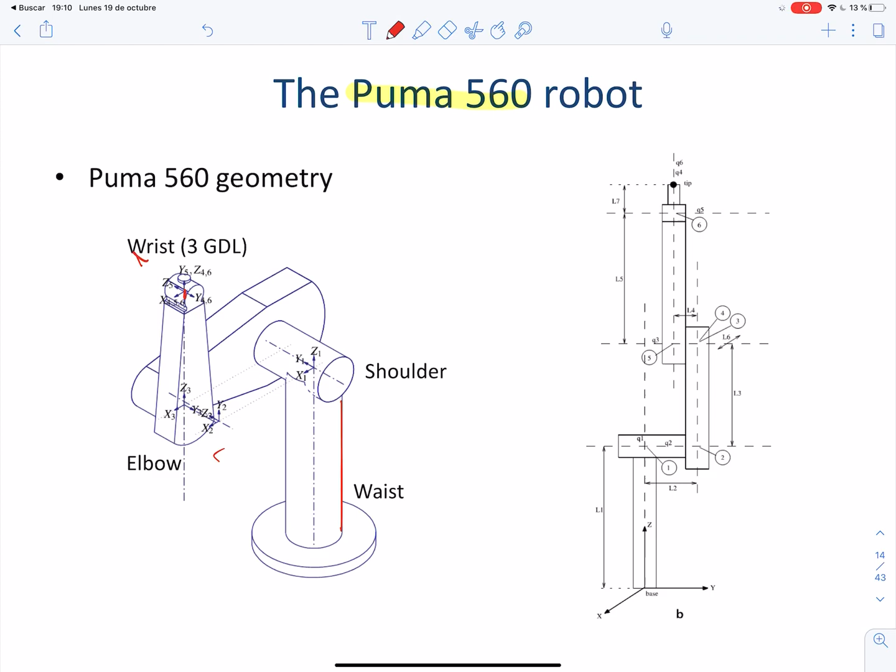For some reasons, one of them is practical, but other reasons are purely mathematical, as we will see in this chapter. So it's not hard to see that there are 6 coordinate frames, and these are presented here. There are 6 joints. This is the frontal view of the robot on the right.

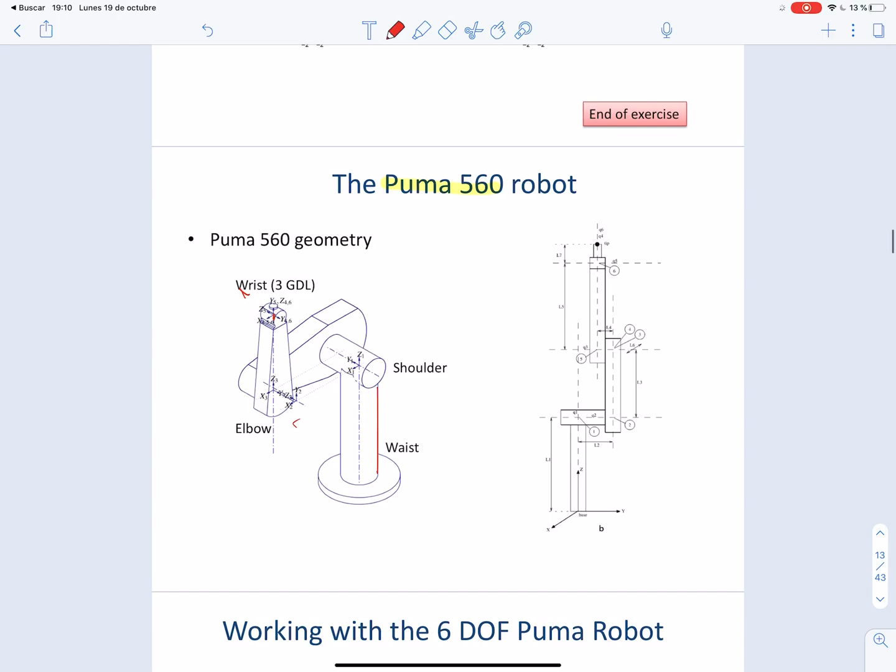And the nice thing is that we are going to work with a model of the Puma 560 robot in MATLAB. The model is included in the robotics toolbox that we have been using already. But after the regular loading of the robotics toolbox, which often comes with calling startup RVC, we then have to load the specific robot model by writing MDL_Puma560.

And from that moment there's a new object or variable that appears in the MATLAB workspace called P560. So this is a new variable. But more than a variable, it's an object, and an object is like something more powerful than a variable, because it can have values, like for example...

P560.links. It has some values which are the links that form the serial link object that is inside it. But it also has methods, like the forward kinematics method that we have introduced before.

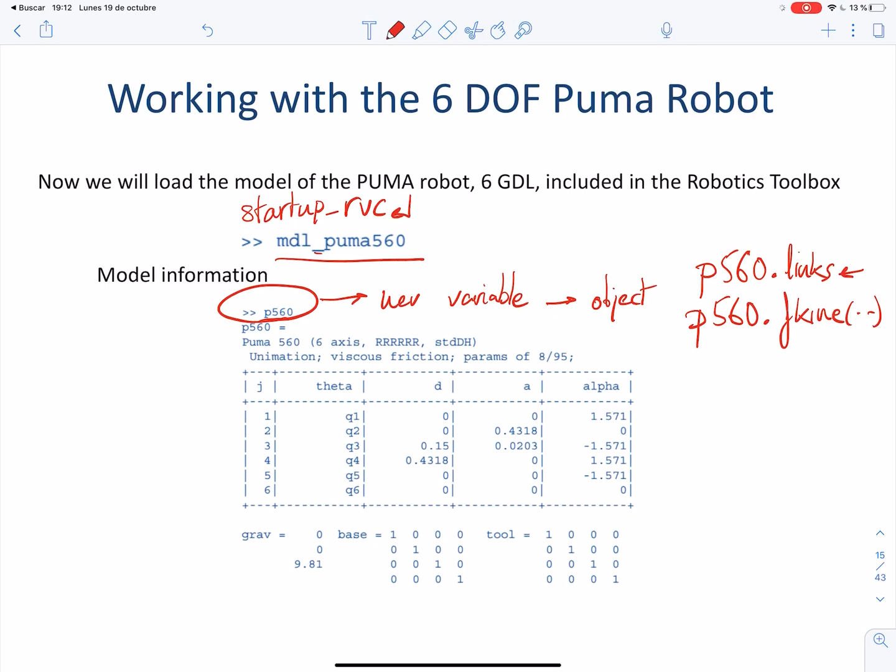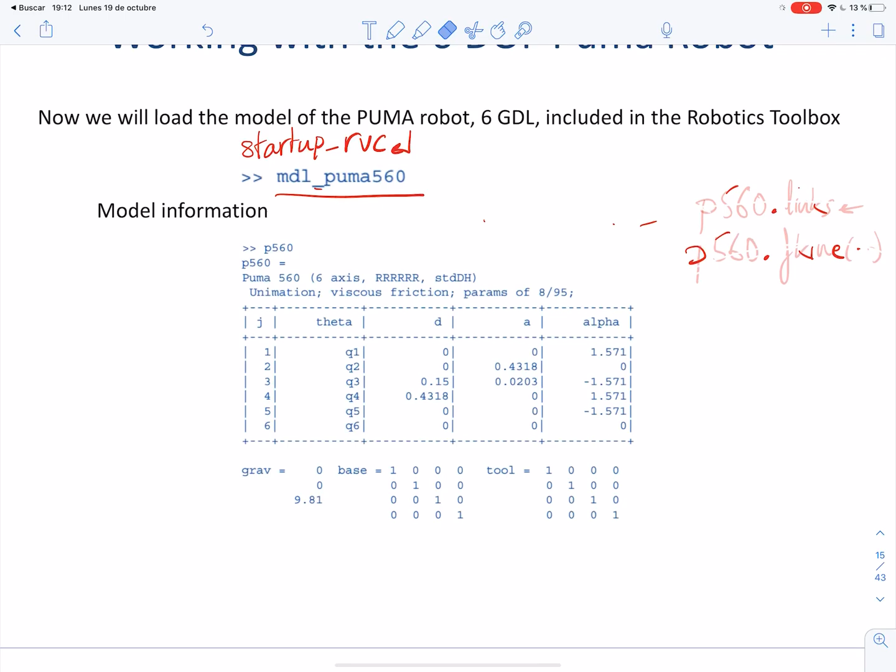And the point is that in order to take a quick peek at the contents of this object, we can just write in MATLAB: P560, and enter. MATLAB will give us this information in return. First of all, this table appears with what is easy to identify as a set of Denavit-Hartenberg parameters.

So there are of course 6 joints, so there are 6 sets of parameters here. And what is more remarkable or interesting is that the theta variable in each of the joints is actually the time varying variable, the non-constant variable. This is equivalent to saying that all the joints are revolute, are rotational.

There are no prismatic joints. But if we remember from the first discussion, not having any prismatic joint does not imply that dj must be 0 for all joints. So there are specific values that we associate to the displacement of the coordinate frame along the axis of rotation of the joint. These are non-zero values necessary to perfectly describe the geometry of this robot.

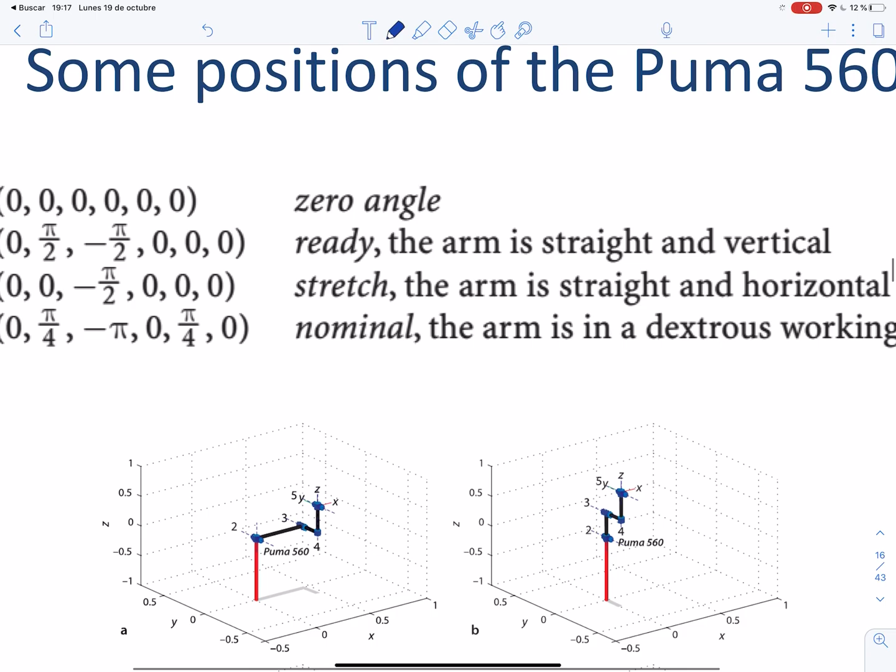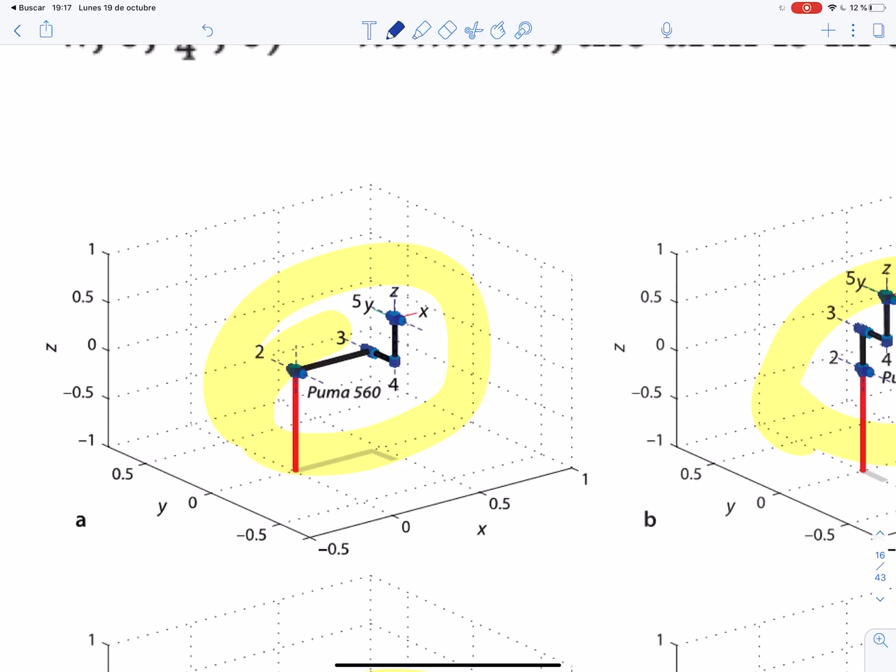And now some more about the new robot called Puma 560. In this slide we observe a set of 3D plots of something that, if I didn't tell you, you would have never thought is a robot, but it is. This is a representation of the robot with all its joints.

The first joint is around the vertical axis, so it's not depicted here, but the second joint is this one, easy to see as a shoulder. The third joint is easy also to see as an elbow. And then finally the three remaining joints represent the end effector of the robot.

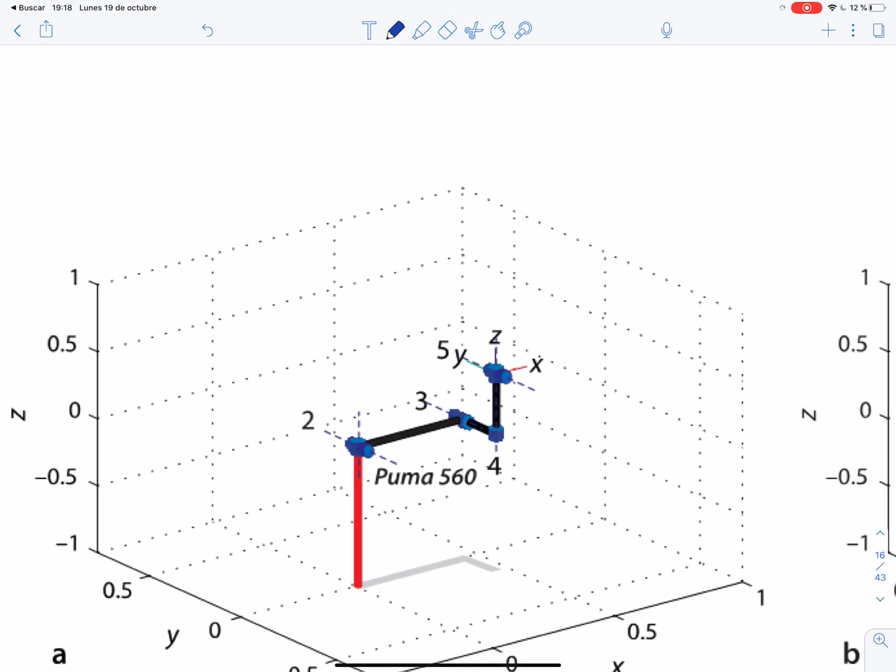This depiction of the robot might seem not intuitive, but it is a nice way to represent a robot, because you are visualizing just the things that are important for the kinematics, which are the axes of rotation. This is an axis of rotation, this is another one, vertical, and this is another axis. So it's interesting to have a simplified representation where only the axes of rotation appear.

And the axes of rotation are not coincident, so there are distances among them, and these distances are due to the fact that the Denavit-Hartenberg parameters are not zero, so we must make displacements to go from one axis to the next. Once we have an idea of what this plot means in 3D, not forgetting these three axes are X, Y, and Z.

Once we know that, we can represent the robot at different configurations. These configurations, which are just like poses or positions of the robot, are identified by the value of the angles of each joint of the robot at a given time. As the robot has angles at each joint, we can call them Q.

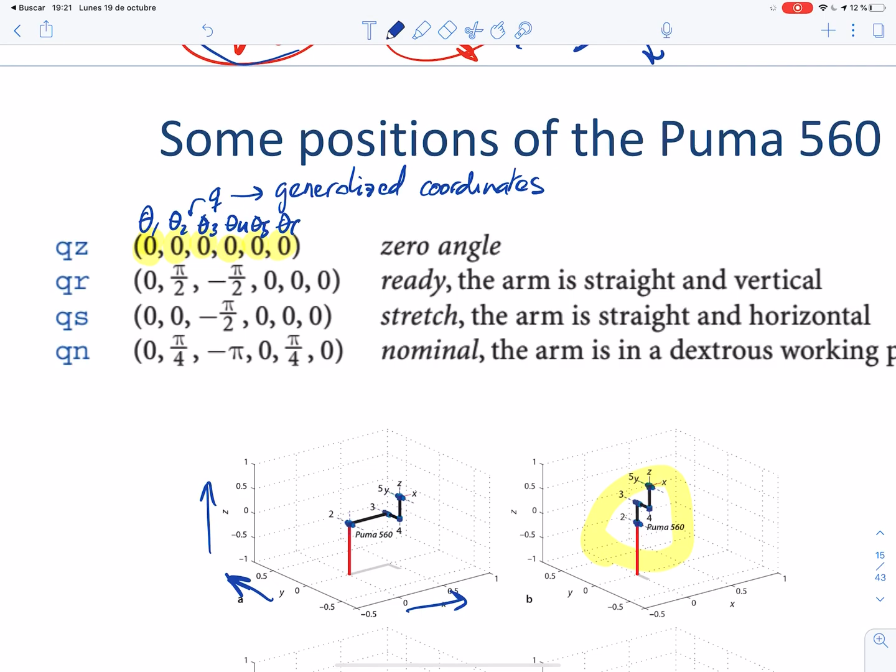There's an equality between generalized coordinates, which in physics are normally represented by Q, the vector of generalized coordinates, and the set of values of all the joints of the robot at a given time: theta 1, theta 2, theta 3, theta 4, theta 5, and theta 6. So using this correspondence, we can understand that this vector of six elements represents the present value of each of the joints, each of the axes, at a given time.

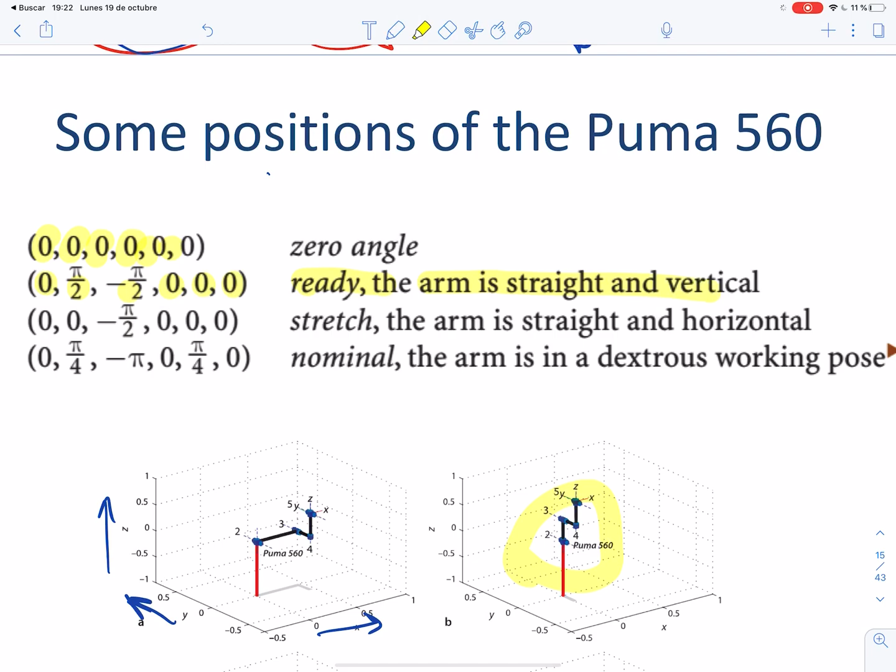And the toolbox, initially when we load it, appears with a set of Q vectors preloaded in memory. First is QZ, where all values of theta are equal to 0. Then QR, with these values: 0 for the first joint, pi over 2 for the second, minus pi over 2 for the third, 0, 0, 0. This is called the ready position, and it happens when the arm is straight and vertical. It corresponds to this image here.

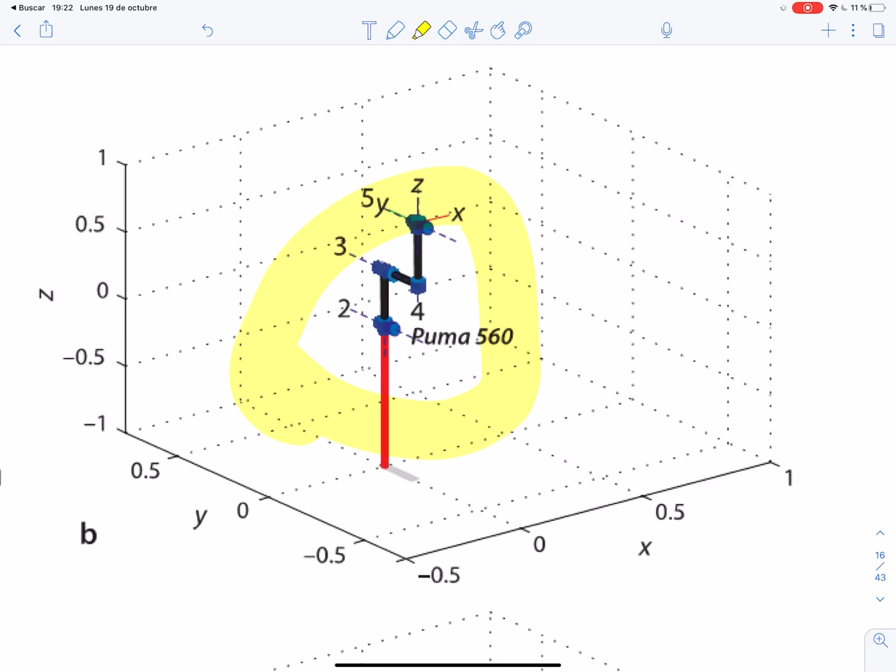Someone might think by looking at this image that the value of all the coordinates are equal at a given time, but this is a bit misleading. Don't forget that not only the thetas determine the position of the robot, but also the other Denavit-Hartenberg parameters that are not visible here. They were visible in this previous table. I hope this comment is not too complex.

There's a third set of values called QS, which correspond to what we call the stretch position. It happens when the arm is straight and horizontal, and it corresponds to the values of theta 1 equals 0, theta 2 equals 0, theta 3 minus pi over 2, 0, 0, 0. This is visualized here.

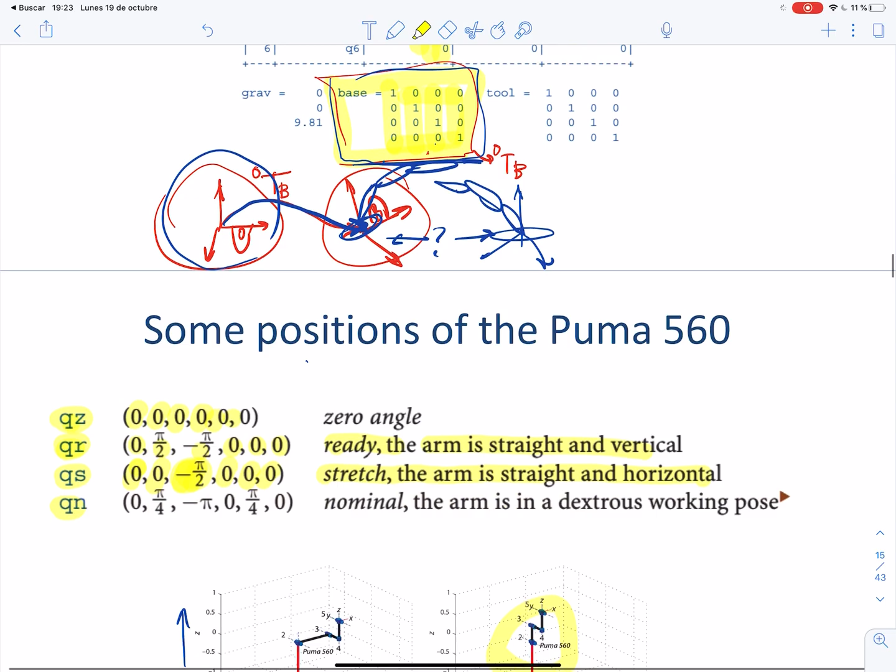Observe that in order to have the robot totally flat and stretched in the xy plane, we need not all the variables to be 0, but we need this pi over 2 element. Why? Because of the alpha parameter that introduces rotations from one coordinate frame to the next, from one joint to the next — rotations that are not present in the Q variables.

There's a final predefined variable called Qn, the nominal position, corresponding to the situation in which the arm is at the dextrous working pose. This idea of dextrous is like looking at the shadow that is projected down here, as if it were the hand, shoulder, and elbow of a person.

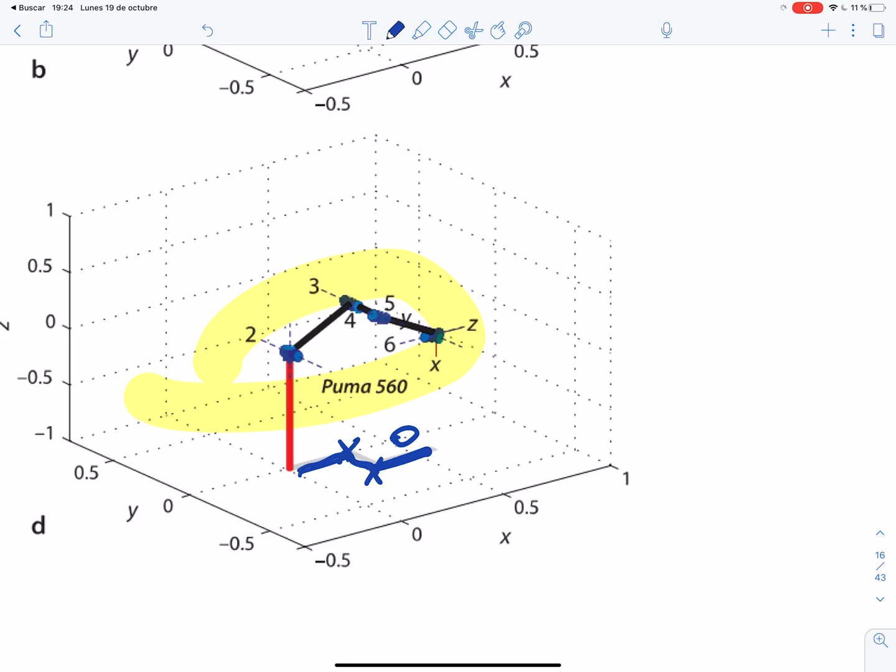It is clear that person would be working with their right hand, because this joint is to the right of that joint from the perspective of the robot. That's why we call it dextrous.

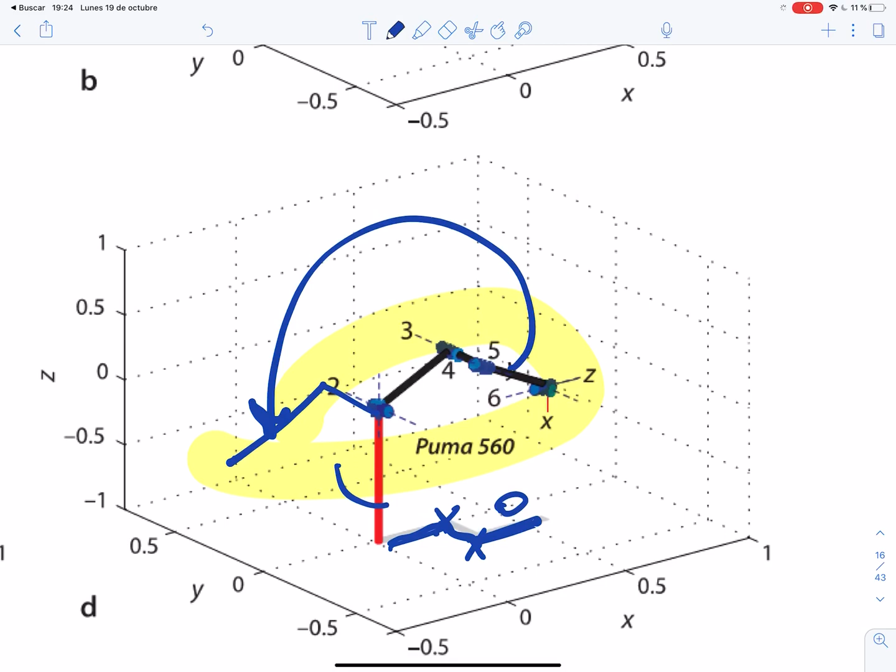The robot could flip around perfectly — we could turn it completely to this position, and then make it turn from the waist another 180 degrees, and we would obtain totally the opposite shadow. So the robot has two configurations that are very similar but not exactly the same.

Still, QN is interesting because many robotic applications start with the robot at the QN values. This is a practical situation where we leave space to introduce new parts to be accessed by the robot. Some joints of the robot are elevated with respect to the working part, and that leaves space for tools and new parts to enter the system. So in summary: zero angle, ready position, stretch position, and nominal position.

Now let's talk about the forward kinematics of the Puma 560. Talking about forward kinematics is just talking about a function that receives as input the vector q — the present value of all the coordinates, that is, all the theta angles of the robot — and this operation computes the homogeneous transform matrix that changes coordinates from the end effector to, I would say, the zero coordinate frame. But if someone of you is really aware of what's going on, they would say no, this is about B, not zero.

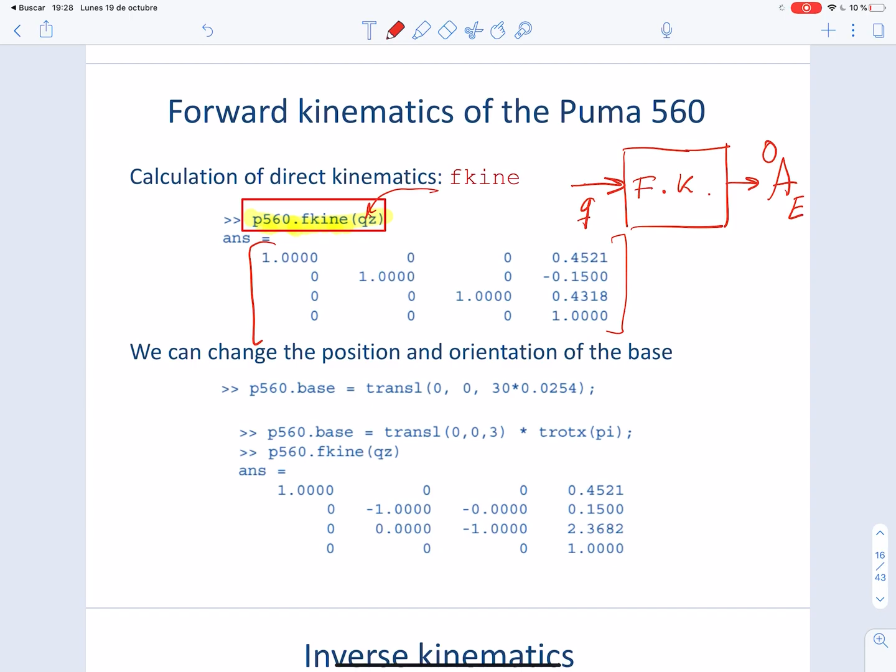Now there's an operation that's interesting to do: let us, for the first time, change the base of the robot. We're going to separate the robot from the universe coordinate frame to another coordinate frame that will be the new B coordinate frame, according to our notation. This is done by assigning a homogeneous transform matrix to the base component of the object P560. We're assigning this matrix — here we have an identity matrix, and here we would have these numbers.

So here we have 30, by the size of an inch actually, so I'm not filling the whole thing in. Okay, so this is the homogeneous transform matrix.

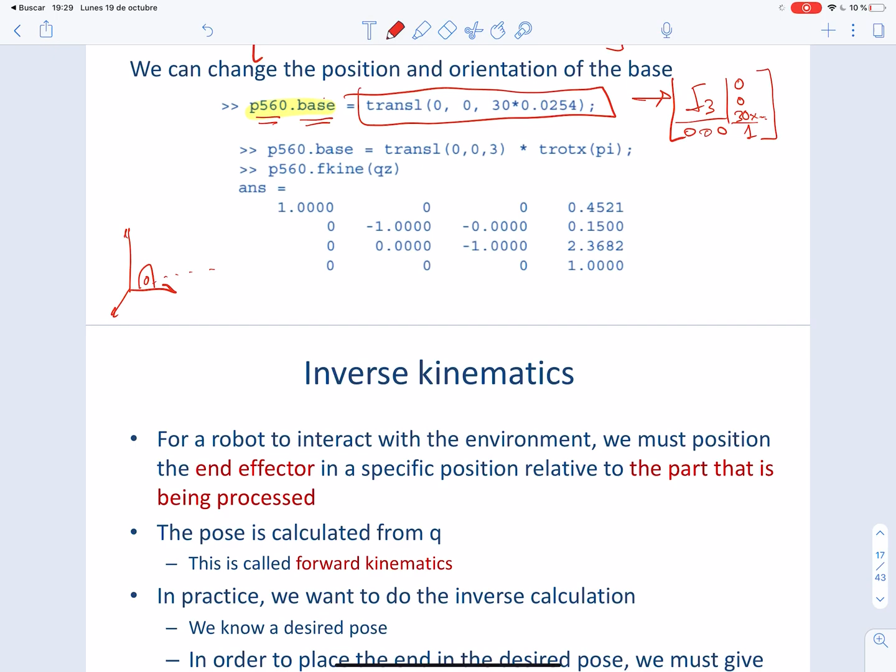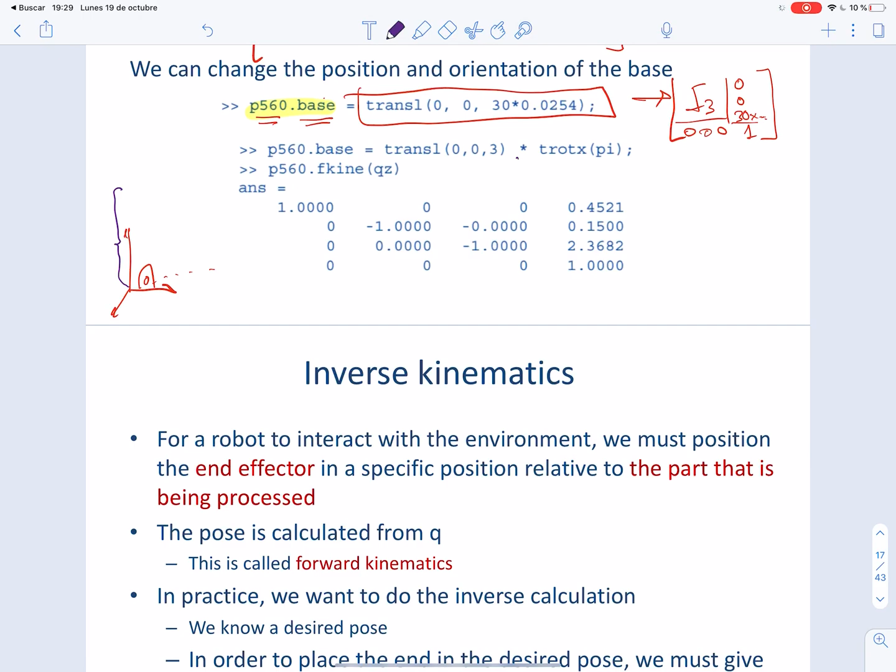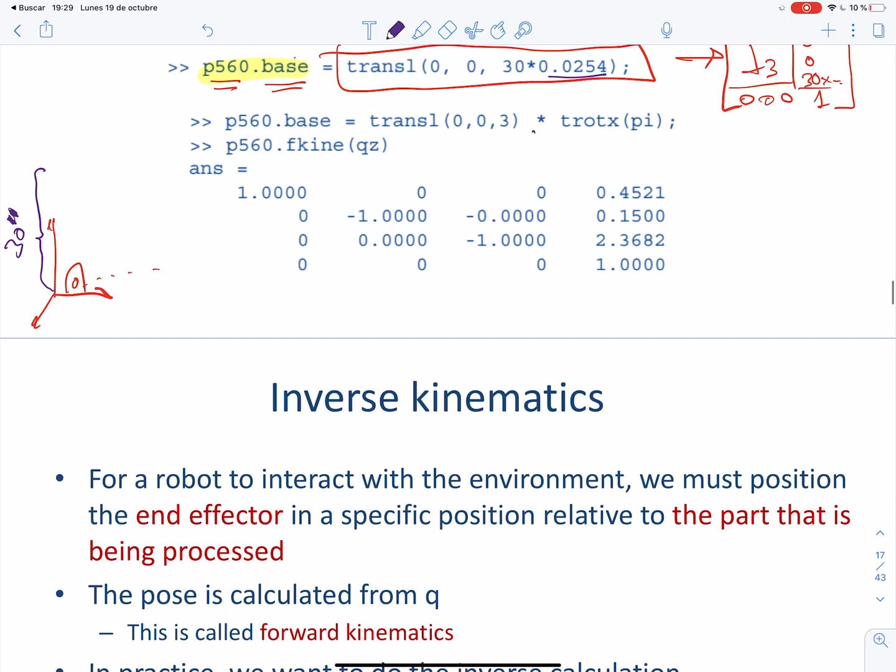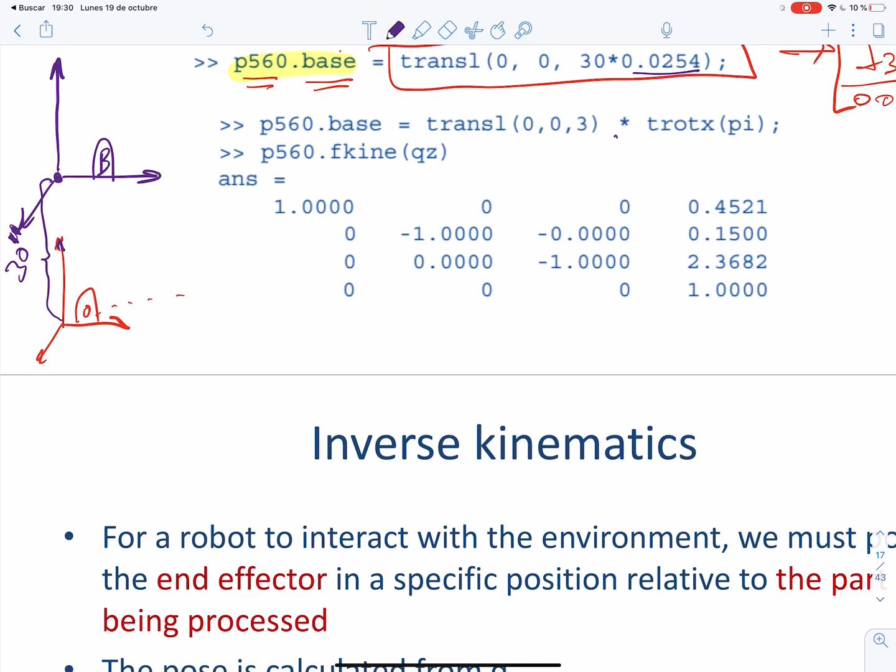This corresponds to the vertical displacement of 30 inches along the Z direction. If you want me to be more precise, I'll write exactly where the B coordinate frame is, using a different color. So there's some distance called 30 inches. That's why we multiply this by this, because this is the size of an inch in meters. Then, 30 inches upward in the Z direction, we would find our newly located base coordinate frame. So this is what we are specifying here.

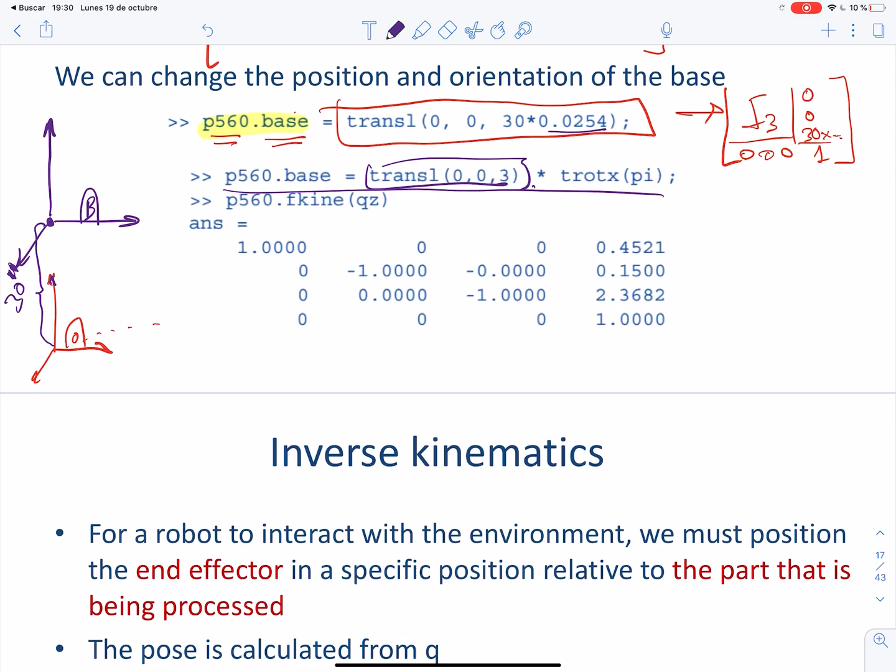Now let's make a second try, which is, let's reassign the base of the robot somewhere else. Somewhere else, which is actually a translation of 3 units upwards. So this new situation would be something like that. I'm going to write it here to the right.

So I would have here the initial coordinate frame X, Y, Z of the universe. Now let us think that there is a vertical quantity called vertical distance of 3 units that would redefine the origin of the new coordinate frame.

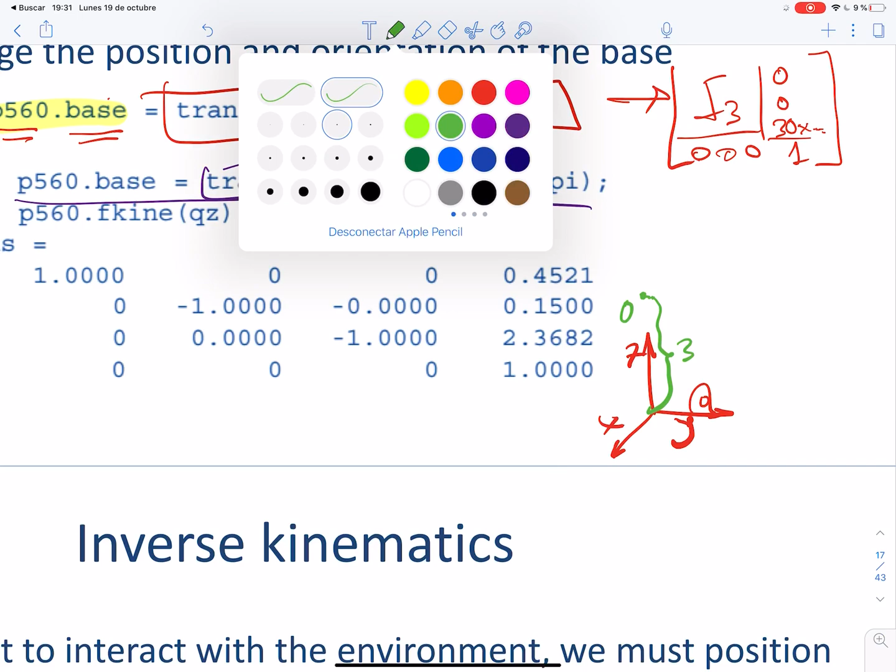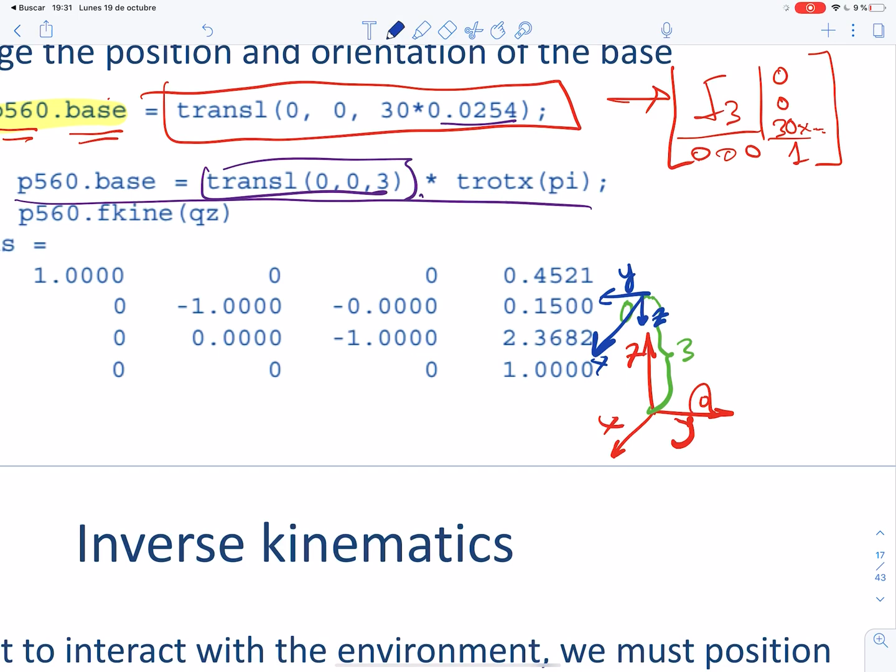But after that, there should be a rotation around the x-axis of pi. So the new coordinate frame will result in this being the new x-axis, this being the new z-axis, and this being the new y-axis. So this would be the new base, or B, coordinate frame.

And the product of these two matrices is assigned to P560.base. Now, if we compute the forward kinematics of the robot with the coordinates qz, we have this matrix.

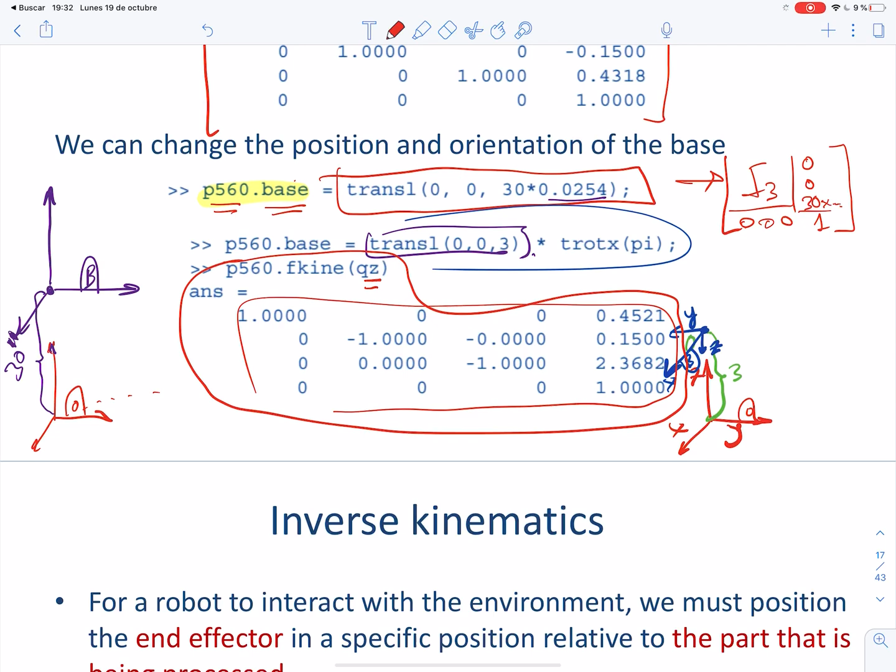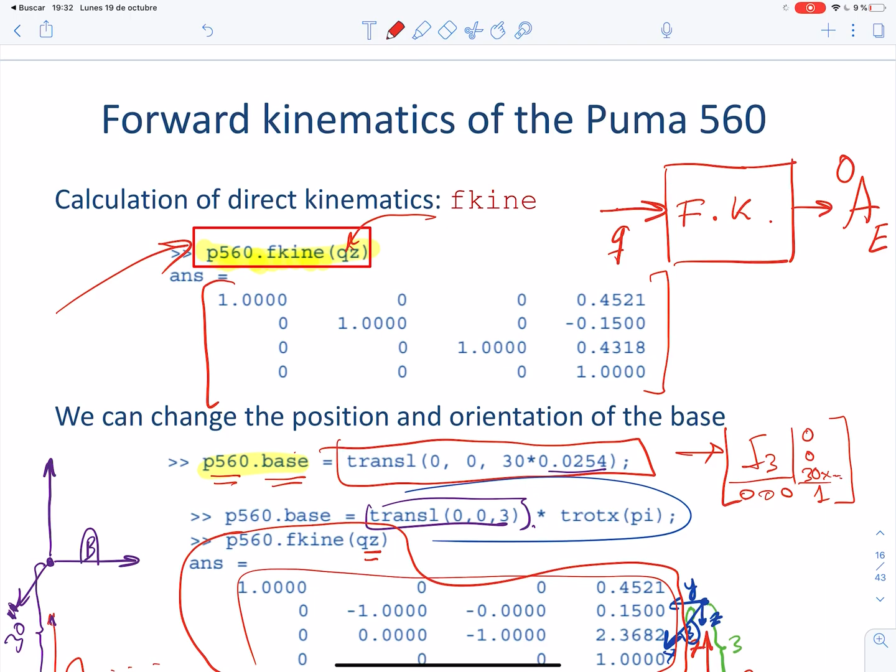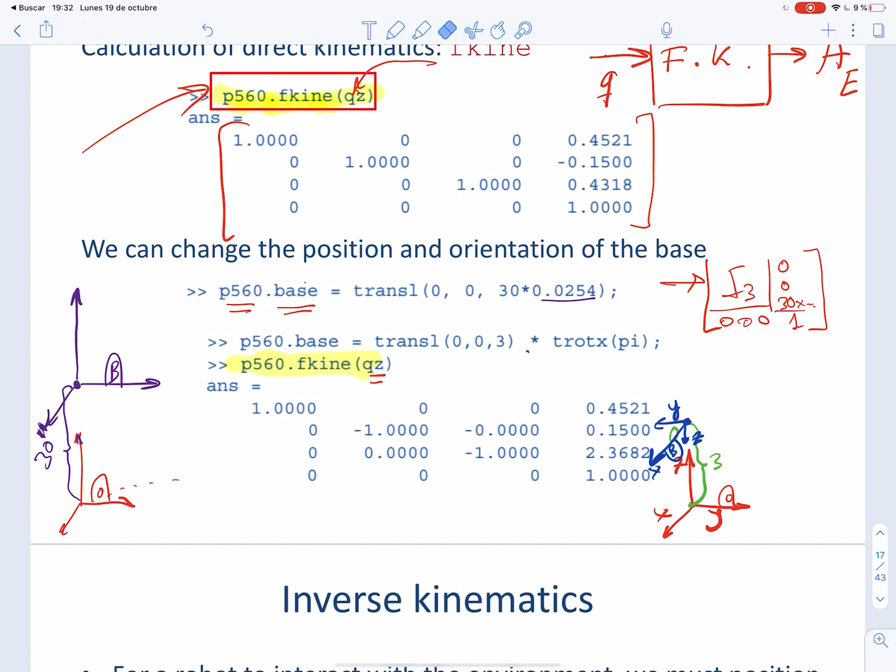The nice thing is that, remember, a moment ago we computed exactly the same p560.fkine(qz), and we are actually computing the same thing. So the two yellow highlighted pieces of text are computing the same thing. Don't you agree? Then let's remove some of the clutter in the slide. And don't you agree that this line is equal to this line, but the results are not equal?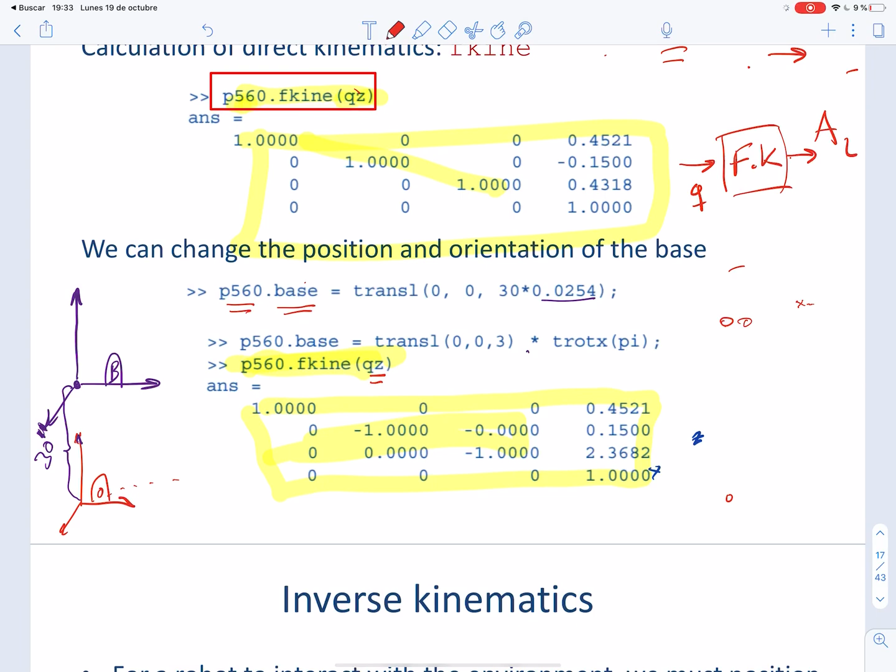Because there is some change in the rotation matrix. This tells us that the forward kinematics computed in MATLAB is actually the homogeneous transform matrix from the end effector with respect to the universe, to 0, and not with respect to the base. That's a very important thing. If the homogeneous transform matrix were defined with respect to the base, it would not change with the change of base, but it is referred to the universe. So the effect of changing the location of the base changes the relative location of the end effector with respect to the universe.

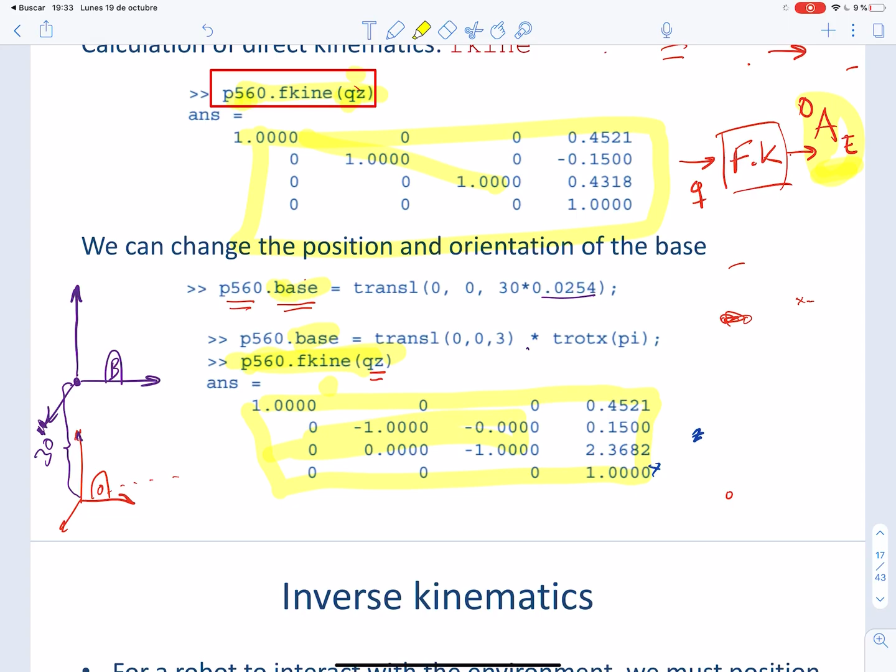So there's a final very important operation, which is the inverse kinematics. Again, it is a calculation that can be defined if we remember what the forward kinematics is, which is starting from Q, we have A, E, 0. The inverse kinematics is just the inverse operation: starting from A, the homogeneous transform matrix of the end effector with respect to 0, it would compute the set of Q values, that is, the angle of each joint that will result in the end effector having the pose described by 0AE. Is that sentence clear?

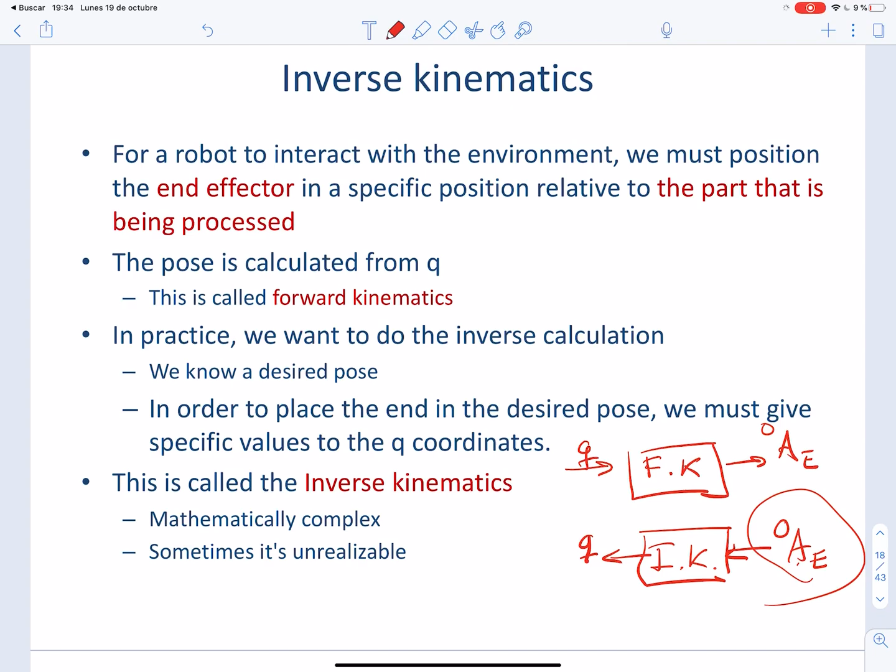I mean, given a desired pose, if we want the hand of the robot to be somewhere defined by A, then the inverse kinematics will compute the values of all the angles that will make the hand reach that point. This is something very intuitive, and we are doing that all the time as humans. Think of our hand.

Sorry for plotting our hand as a robot hand, it looks like it. But imagine that we are just touching this frame with our hand. For example, that we are cleaning the frame, and we want to move the hand along the surface of that frame in order to clean it.

What is our brain doing while we are cleaning that wall? Well, we are solving the inverse kinematics problem, because the position of the hand is what we call the desired position. That is, this is where I want my hand to be because I want it to perform some task. And in order to do that, I need to fix my joints at some angles that, putting them all together, joints 2, 3, 4 and so on, cooperate to bring the hand to the desired position. So we have joint angles.

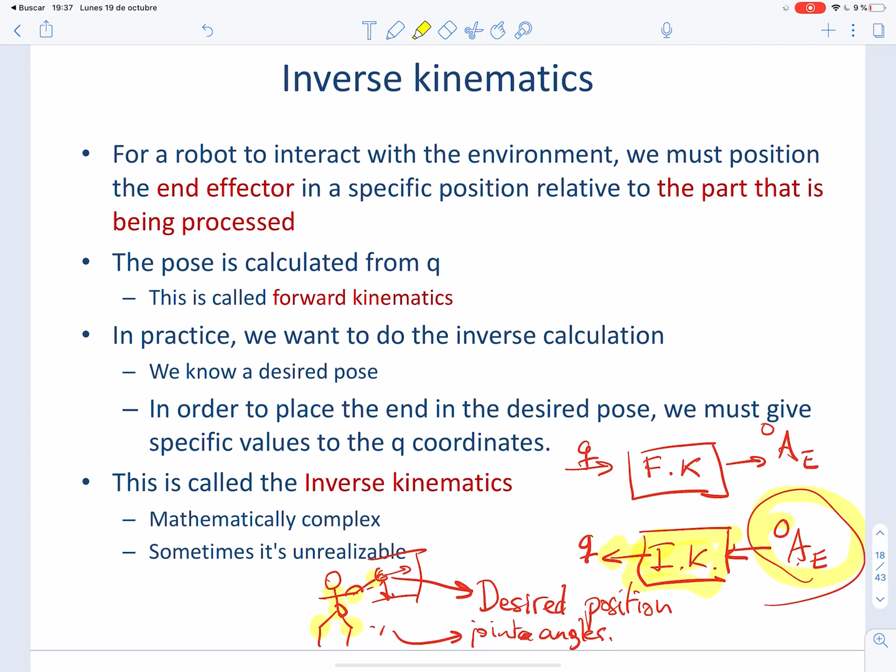Okay, do you agree with me? The hand cannot fly. The hand can only reach the desired position by moving each of our joints one by one to a specific value, right? And those specific values are computed by the inverse kinematics. So in a way, our brain starts with a desired position and it computes the values of each of the joints. Is that clear?

So this really summarizes what we have. Assume that we have a desired pose, and to place the end effector in that pose, we must give specific values to the q coordinates. This is an operation called inverse kinematics, and it is generally performed using the ifkine function. As we said before, the ifkine function should receive a homogeneous transform matrix as a parameter, and as a return it will give a vector of generalized coordinates.

As we are talking about the Puma 560 robot, the function call should follow again this syntax. It might sound strange to you, but this is used in object-oriented programming. Not meaning that we have to learn any object-oriented programming at all, it's just we are using a specific syntax.

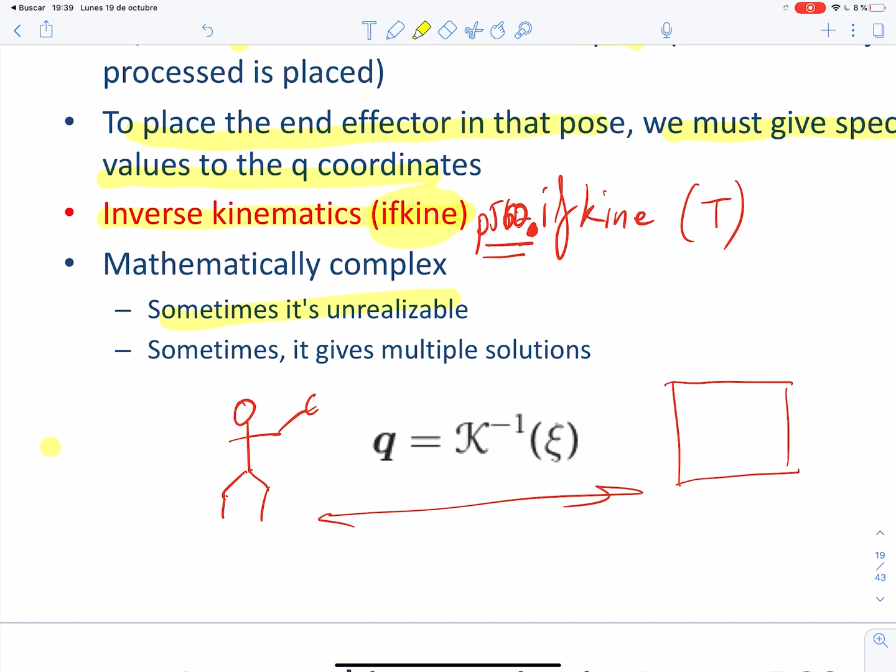The problem here is that the mathematical equations that give us joint values for a desired hand pose are a mathematically complex problem. It's somewhat hard to solve. Sometimes it's impossible. Why could it be impossible? Well, imagine that with your body you want to reach this frame here, so it's simply not reachable, and unreachability is a condition for the inverse kinematics problem to not be solvable. But sometimes it's not the only condition. There are other reasons why it is not practicable, and some other times there is a solution, but it might not be unique. There could be multiple solutions.

Now we will show an example of a multiple solution situation of the inverse kinematic problem. So let's start with this variable qn that we all know. It is preloaded in MATLAB, and it has a set of values of the generalized coordinates that will set the robot in the nominal position, right?

So imagine that we compute the direct kinematics. Okay, sorry, because we are not actually using that word, it's forward kinematics. So we compute first the forward kinematics, and it's like F.K, and then it gives us a matrix A. So this matrix A, or called T in this case, it gives us this matrix, and this is assigned to T.

So now let's pick up again this matrix T and assume that we desire the robot to reach the pose represented by this matrix T. So what would be the generalized coordinates that would reach that pose? Well, logically, if we computed this pose starting from Qn, the inverse kinematics of T should be Qn again. It's like undoing the computation, or doing it backwards.

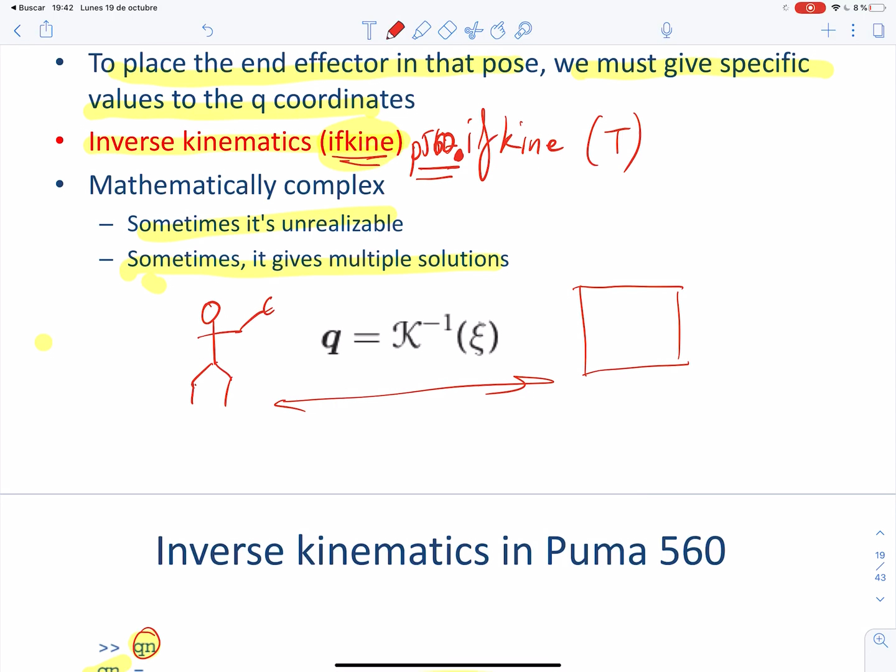But before going in there, I have to roll back a little bit and take a look at this function name. This is not the function I introduced before, this is not ifkine, it's a bit different, it's ikine6s. Let's just for the moment admit that specifically for Puma 560, we will prefer this function instead of the previous one, because the previous one is a generic function that will iterate, and it will take long to make its computations and possibly make errors. But this ikine6s is a specific function for robot Puma 560 and robots that are very similar to it, that is much more efficient and has less error.

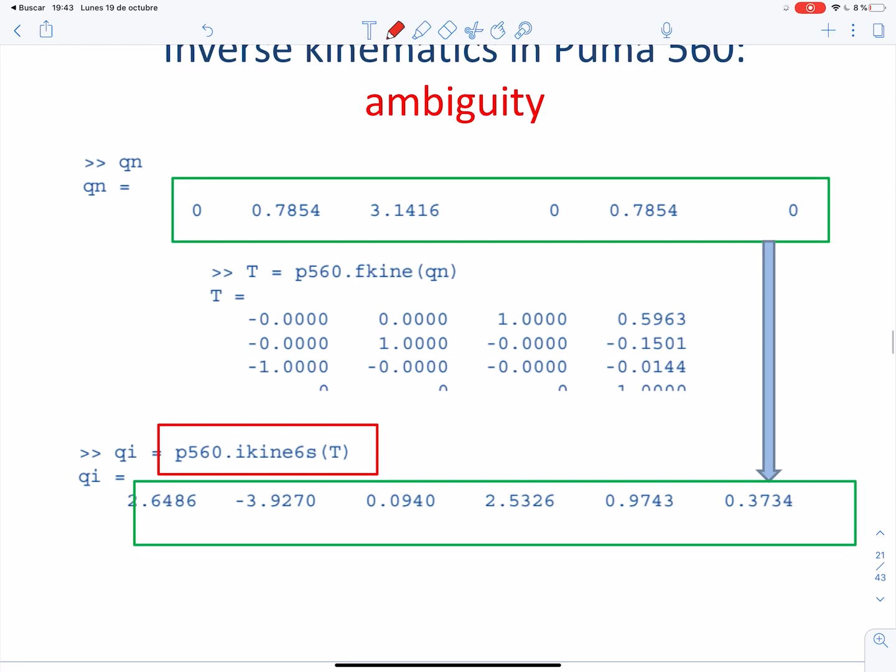So this observation, well, this slide is just reminding us what we have just seen, is that there is ambiguity in the sense that starting from Qn, the forward kinematics will give us a matrix that if we apply to it the inverse kinematics, we don't get Qn as a return. So there is ambiguity. We have said before that ambiguity means different ways of reaching the same position. But we can see this graphically actually.

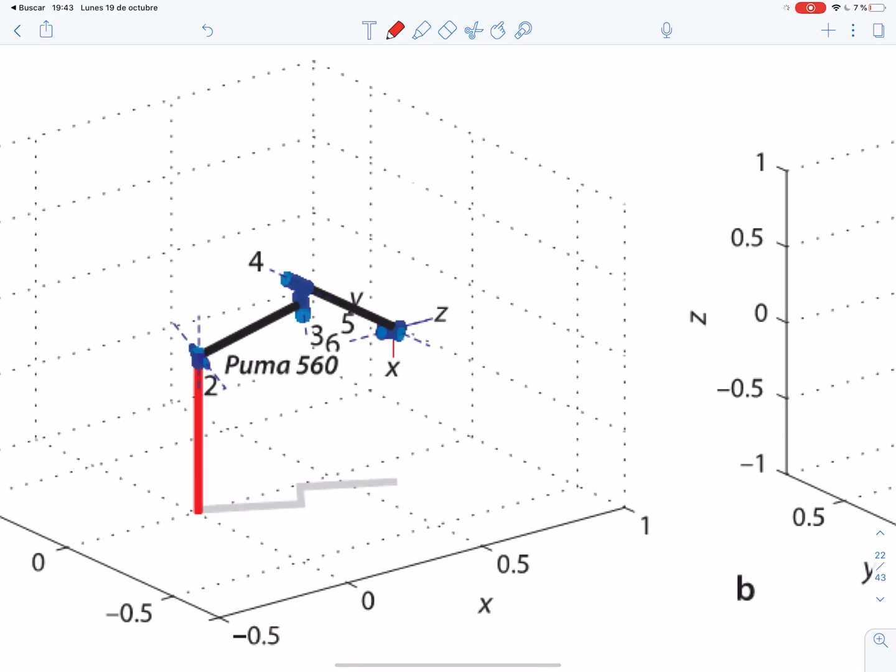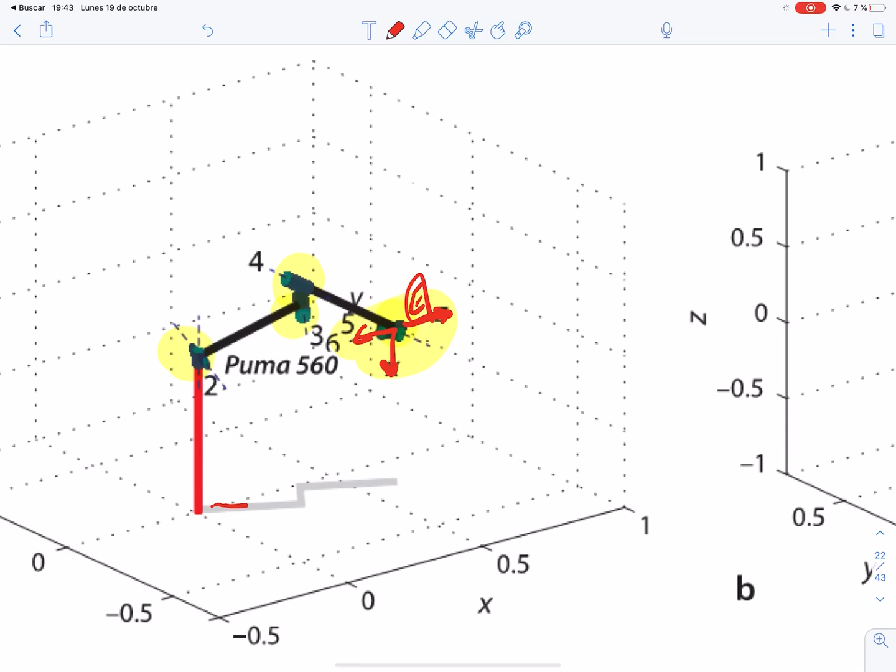This set of coordinate values takes the robot to this specific location of coordinates. This is the end effector coordinate frame. Please look at the shadow - it looks left-handed, in the sense that the elbow opens to the left of the robot.

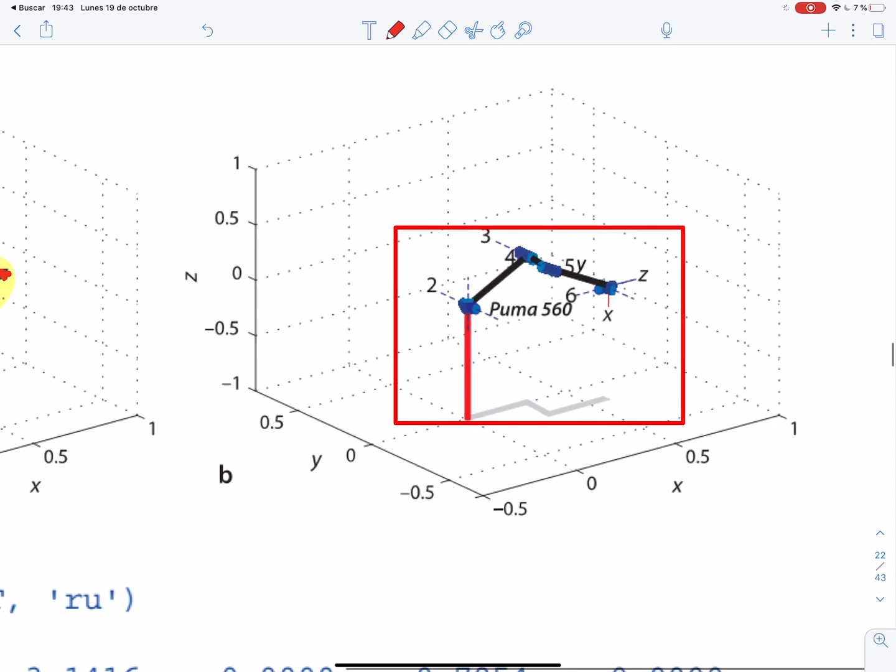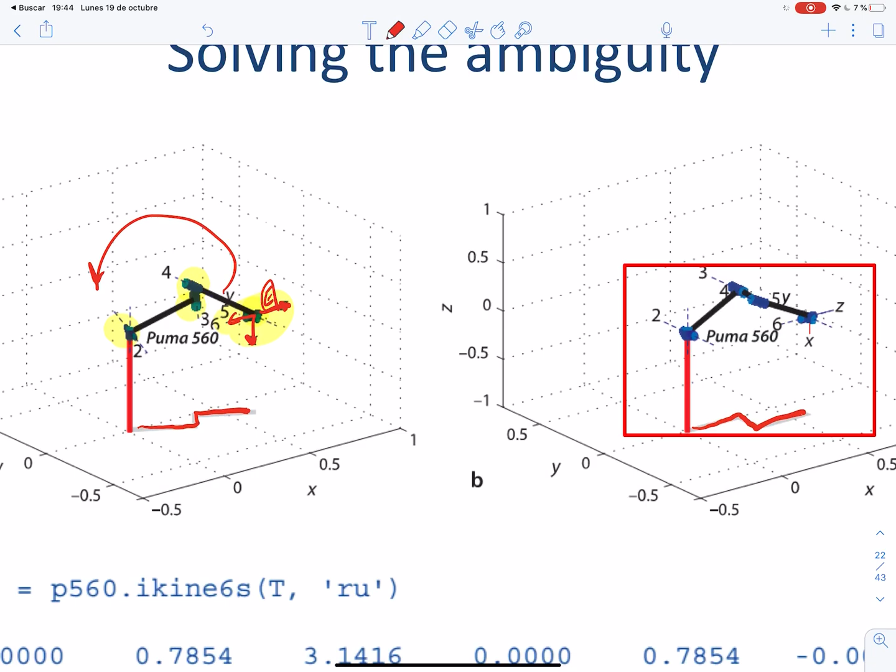Now let's take this configuration, which is totally different. It might seem similar, but look at the shadow - it is right-handed. So to get from one position to the next, we really have to turn around the whole arm, invert it, and then make another twist of 180 degrees. These two positions of the robot are very different, but they reach exactly the same final coordinate frame.

This is why there is ambiguity, because there are different sets of coordinate values that would reach the same final end effector coordinate frame.

So how do I solve this? As the function Ikine 6s can give us different solutions for the problem, we might choose among the possible solutions some specific ones, with specific features, specified by using letters in simple quotes. The first letter appears as R, but it could be either R or L, meaning right or left, and the second would be a choice between U and D, corresponding to up and down.

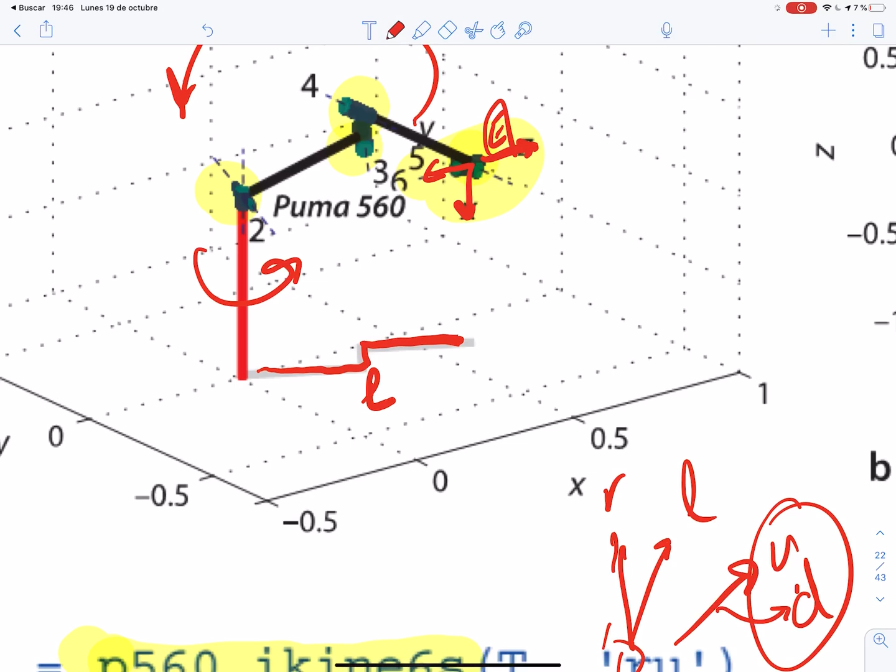What does this mean? The first letter would be interpreted as left-handed or right-handed, and this is clearly seen by the shadow projected on the floor. This would be clearly a left-handed robot. Think of a person picking something up - if the shoulder opens to the left, this would be left-handed, and opening to the right would be a right-handed person. So the ambiguity between those images is solved by specifying L or R. If we specify L, we are referencing the first image.

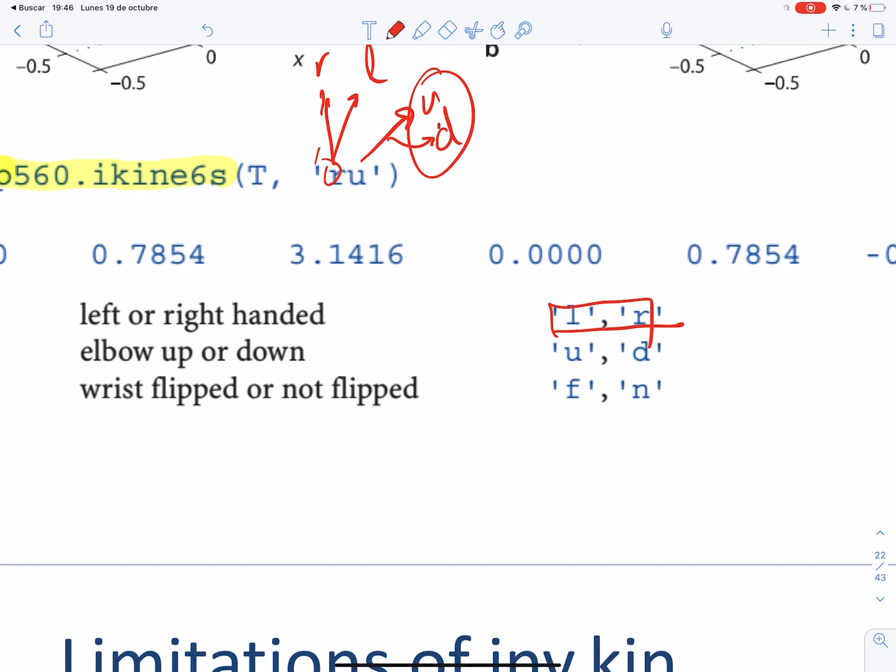Elbow up and elbow down is also important. Sometimes I can reach the same coordinate frame by turning the elbow of the robot into one of those positions. In this first position, the elbow angle opens downwards, and in this position the elbow opens upwards. But finally both configurations will reach exactly the same final end effector position.

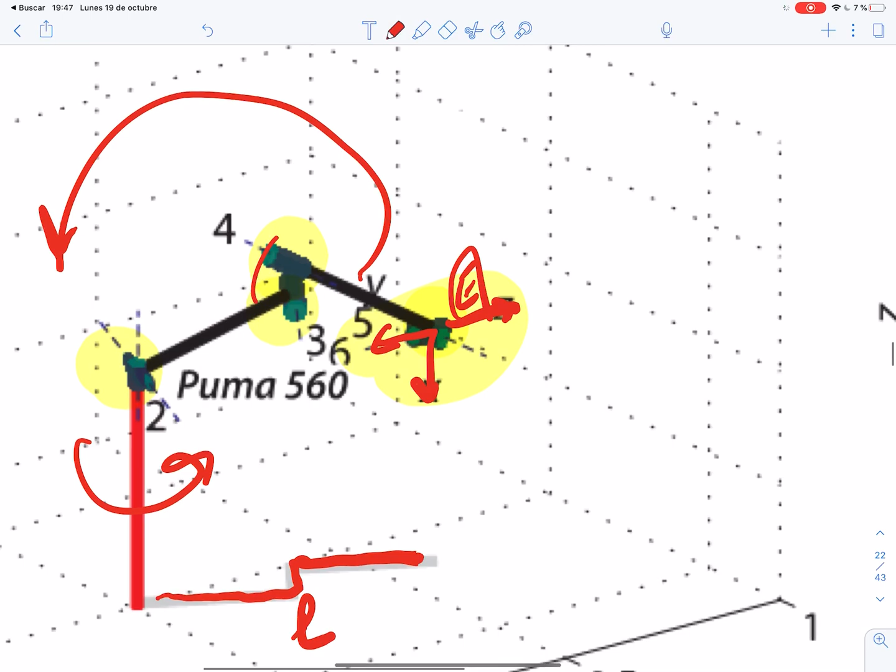So in order to solve this ambiguity, I can specify up or down. Please notice here that the elbow is up in both cases, so this doesn't resolve anything. But if at a given moment we had something like this, it would correspond to the D option. So finally, by calling function ikine 6s with the options R and U, we are telling MATLAB that from all possible solutions, this should be the one that prevails.

Still, ikine 6s will never have infinite solutions - it might have several, but always within a discrete set. Well, there could be some degeneration, so I'm saying too happily that there are not infinite solutions. In some situations there are, but the normal situation is that there are 2 or 3 solutions.

Let's stop a little bit to discuss some limitations of inverse kinematics. The inverse kinematics follows an explicit formula. In other situations, there's no such formula, and an iterative algorithm is required. Iterating should remind us of something from the numerical methods for engineering course, where to solve some problems we cannot just apply a formula - we have to implement an algorithm that after many iterations comes close to the solution.

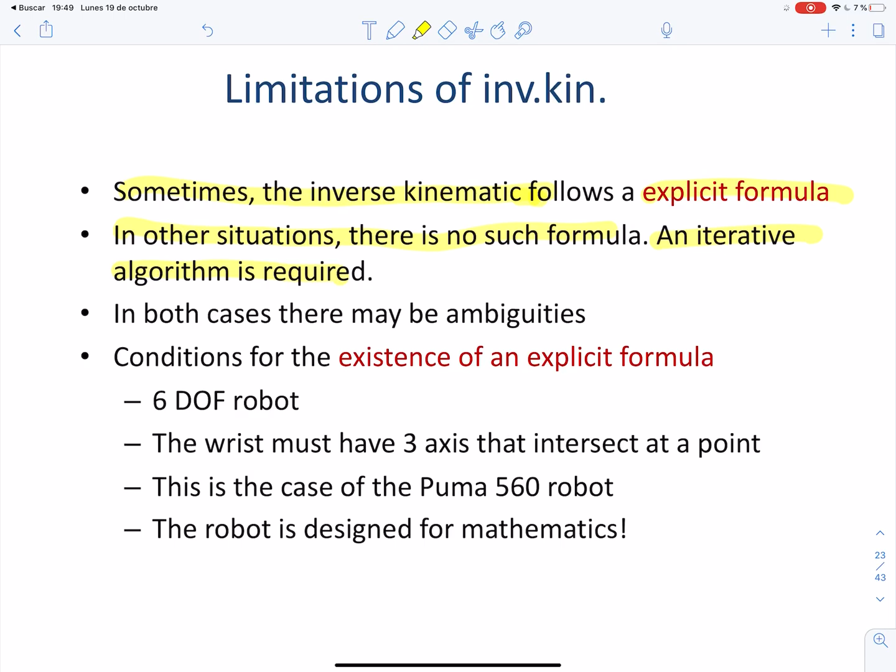So the inverse kinematics in general needs an iterative approach. But even in the case where it can be solved with an explicit formula, there can be ambiguities.

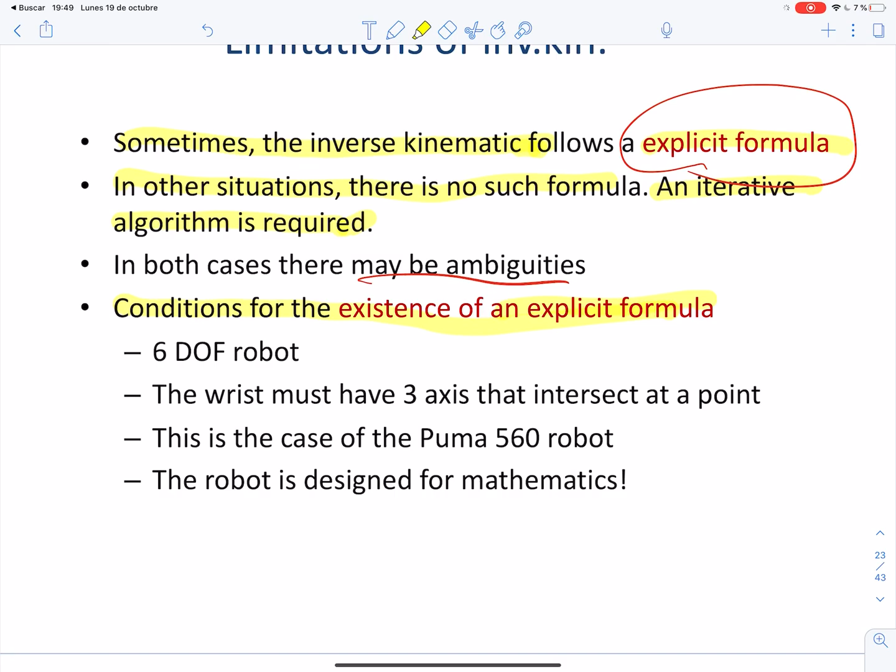We are going to summarize the conditions for the existence of an explicit formula for the inverse kinematic problem. If the robot has 6 degrees of freedom and the wrist has 3 axes that intersect at the same point - for example this is the z-axis of one joint, this is the z-axis of the second, and this is the z-axis of the third, and they all intersect at the same point - then there is a formula that can solve the inverse kinematics problem explicitly without having to iterate, and this is very important in robot control.

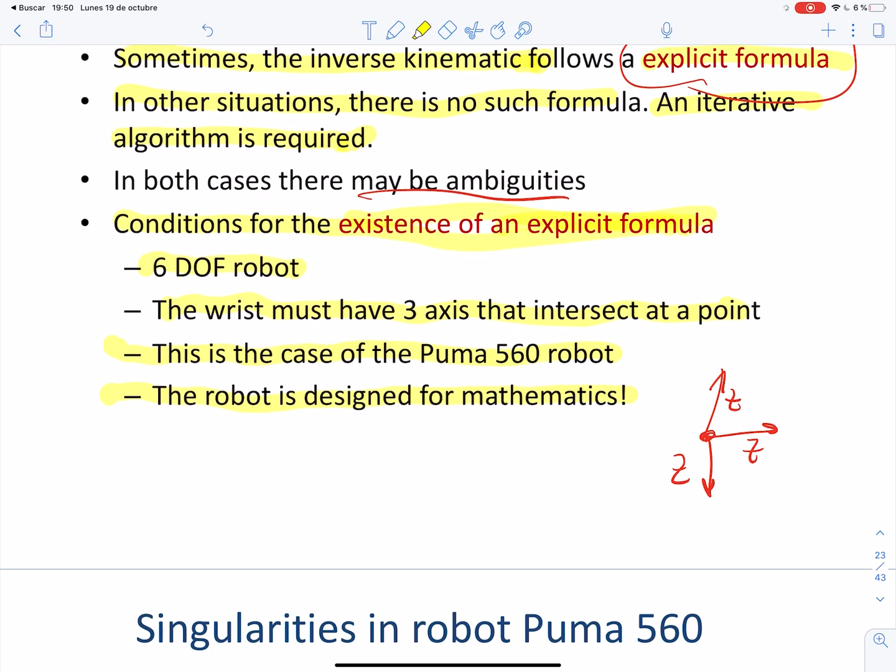This is so important that it's the reason why the Puma 560 has been designed with this particular geometry. In other words, the robot has been designed for mathematics. Now, what do you think - the human hand fulfills those conditions. Has the human hand been designed for mathematics, or has it been designed for making things easier for the controller that we call the brain?

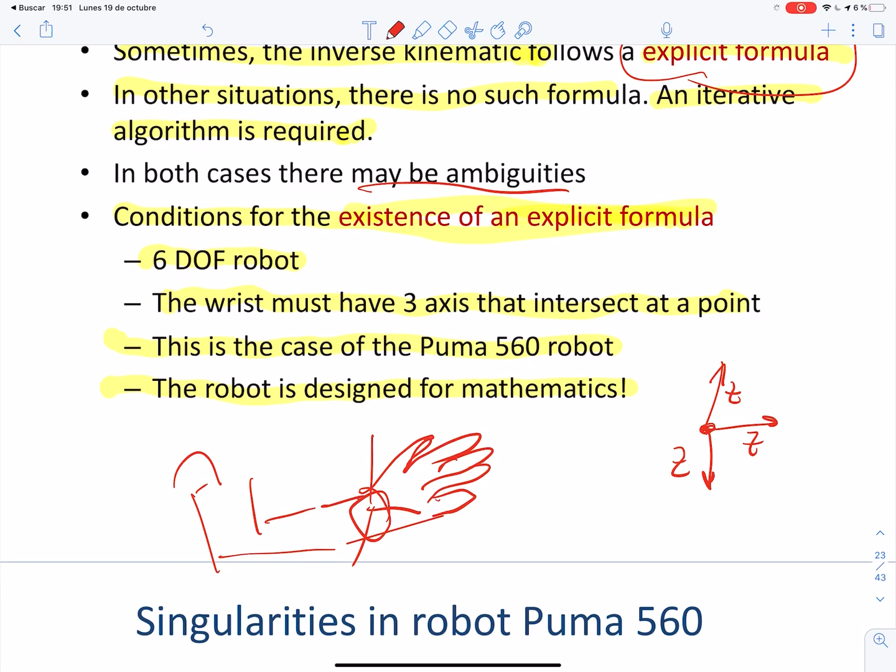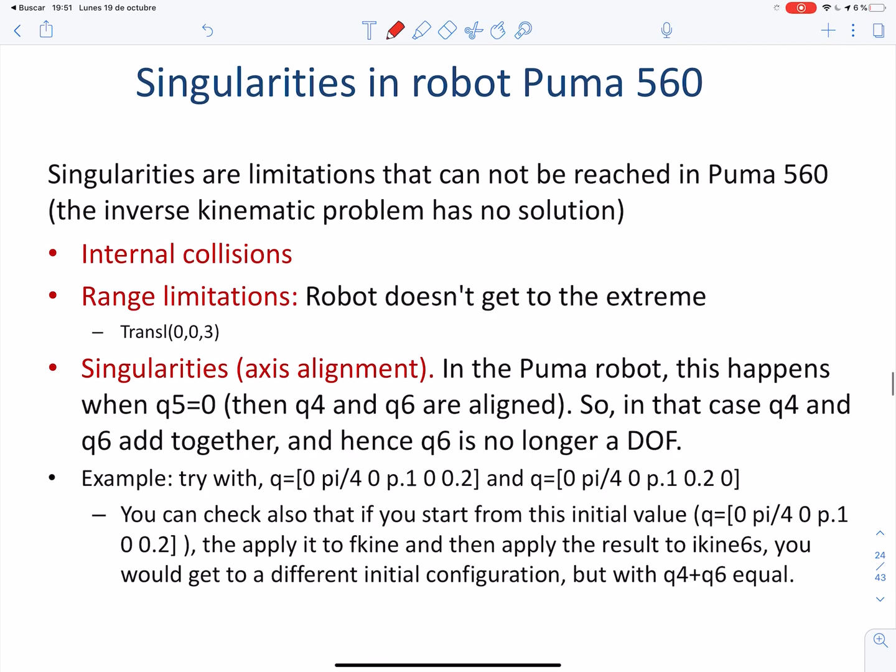Here we have these 3 axes of rotation around the wrist, and then we have the elbow, and then the shoulder. It seems to me that nature also knew a little bit of mathematics when it took the decision of building our joints the way they are. Isn't it curious? I'm going to stop here, not going into singularities in this video.